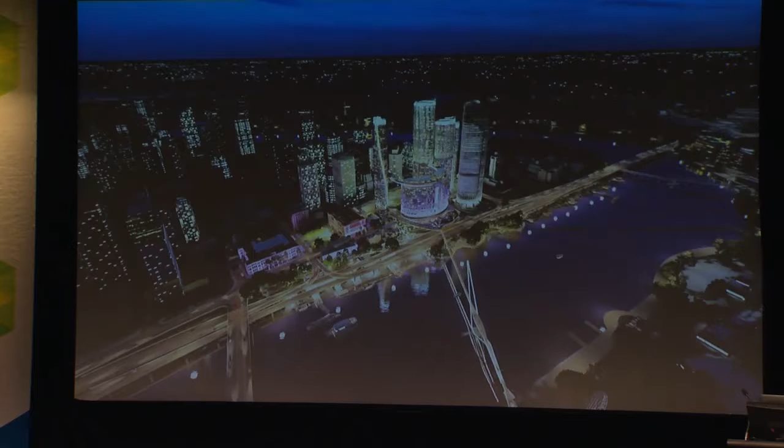So DBC, who are we? We're a consortium of Star Entertainment Group and a couple of Chinese-based companies, actually out of Hong Kong, Chow Tai Fook and Far East. They're mega companies owned primarily by families.

In addition to what they're doing at Queen's Wharf, that same consortia group is also involved in Star Sydney, a lot of work being done over in Perth at the moment, Jupiter's Casino at the Gold Coast, and they've just bought Marina Mirage. Chow Tai Fook have also just bought Alinta Energy, I think they paid 4 billion Australian dollars for them 2 or 3 months ago. So they're mega companies.

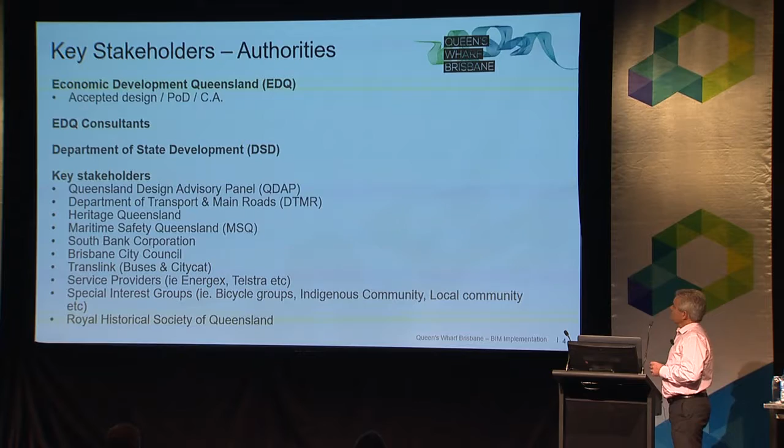On the project, because it takes up about 10% of Brisbane's CBD, a 20 hectare site, every man and his dog wants to be involved in it. So everybody you can think of wants to look over our shoulder and have an influence on what we're designing. This is just a list of a few of them, it just goes on and on.

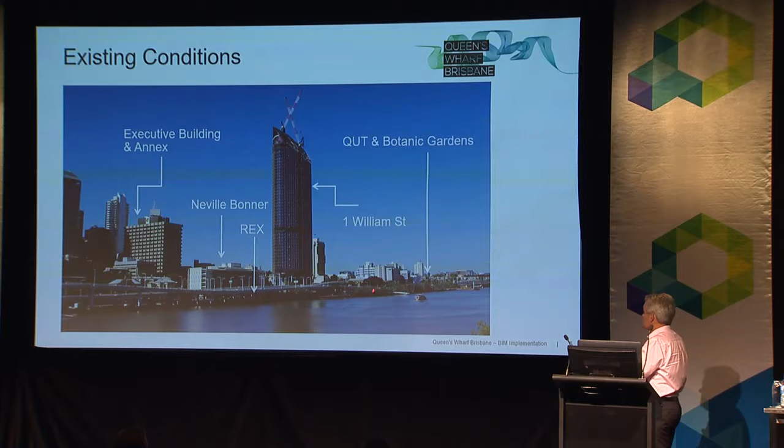The existing conditions, for those of us from Queensland, you'll understand that this area under the Riverside Expressway is not a pretty place to be at night. It's really underdeveloped. The expressway's been an eyesore in Brisbane since it was built, and everyone's struggled with how we get it integrated into a precinct revitalisation.

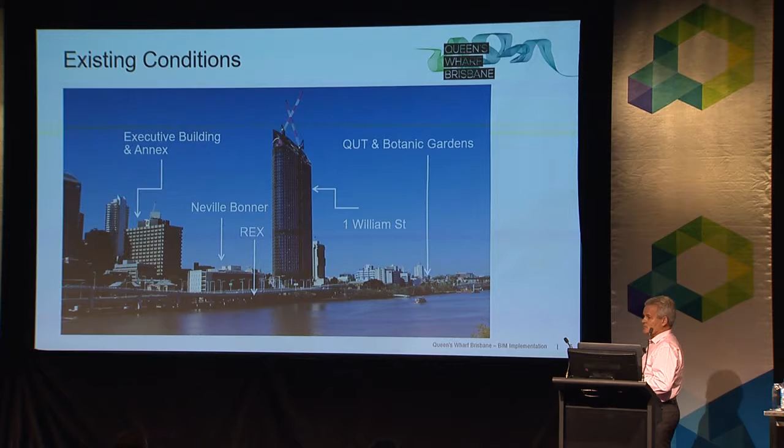So recently the state government moved into their new building at 1 William Street and vacated a lot of these other buildings, the REX, the Executive Building, Neville Bonner, and the Annex. So we've just started demolition of these buildings, these ones here.

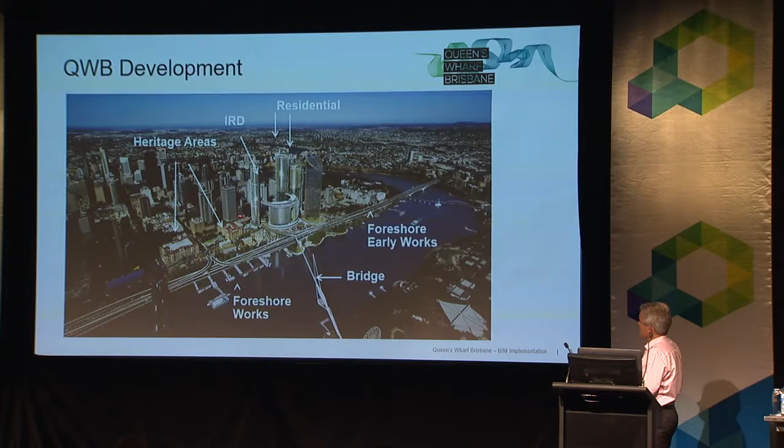And ultimately, that's what the site looks like. Our development agreement goes from the Goodwill Bridge right down to the Victoria Bridge. So in addition to all the sparkly stuff you see here, there's a whole lot of public realm, revitalisation, heritage, and Alastair's presentation will go through some of the work we're doing with that. That just covers the area that our PDA involves.

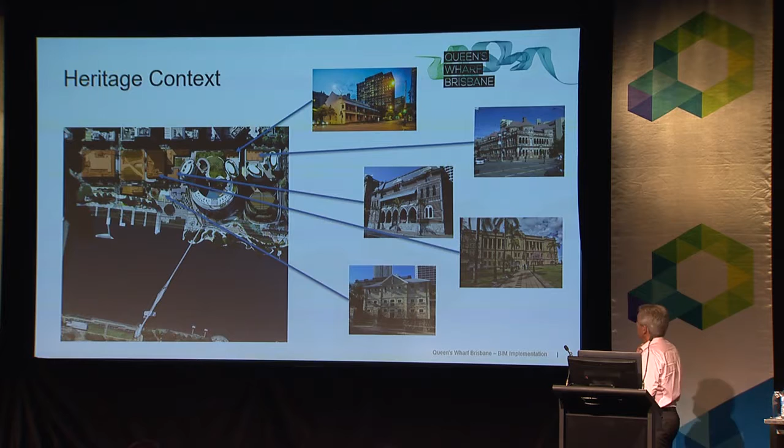There's actually 3 development agreements. There's the one that covers the IRD itself, and then there's a later stage that revitalises the existing casino. A lot of heritage stuff that we've got to build around, vibration monitoring and slump monitoring that we've got going on at the moment, and Alastair will talk about some of the cloud scanning we've done of those buildings.

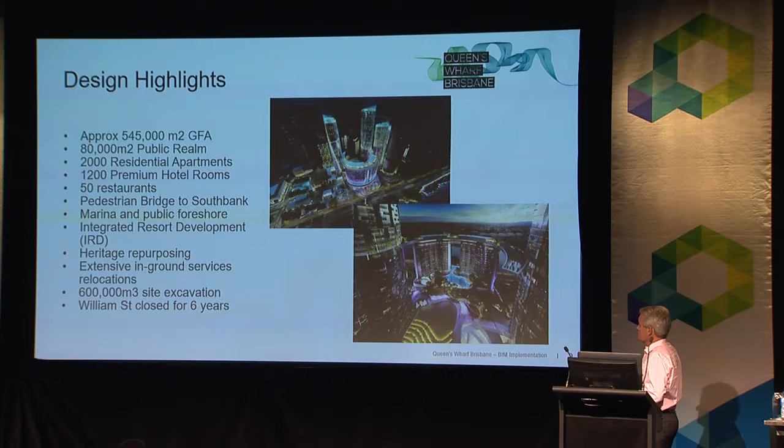It's mega, 500,000 square metres of GFA, 80,000 square metres of public realm, 2,000 apartments, 1,200 hotel rooms, and so it goes on, a mega job. We're just about to start excavation, 600,000 cubic metres of fill to extract. As I said earlier, 99-year operation.

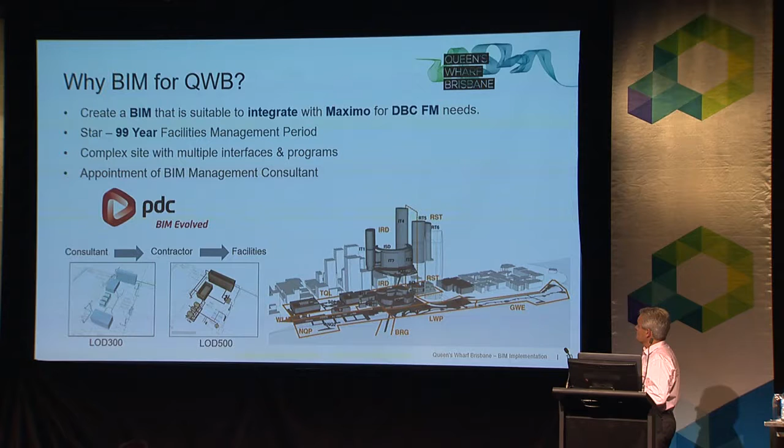It makes, as I say, the I bit out of BIM really valuable to DBC. Luckily, the first day I was on site when I started, Paul Nunn walked into the office. Paul's changed horses since then, but I thought we were in pretty safe hands. So PDC were engaged really early to drive the BIM process, which Alastair will explain.

So I suppose what I'm going to talk to the group today about is how you've seen it's an amazing project, but how we actually approached implementing BIM on something that has multiple different stages, multiple different contractors, multiple different programs, design and construction, and how we're going to tackle that, and what a client actually wants to use BIM for.

So, to get the marketing slide out of the way - PDC is predominantly a shop detailing company that originated in Perth about 44 years ago, but we've transitioned now and we do have a BIM management consultancy division where we deploy BIM strategies and solutions for clients, contractors and trades as required. We've been engaged by John Holland on the Perth Children's Hospital to deliver an LOD 500 deliverable, which we're in the handover stage of at the moment. We worked with Multiplex on the Perth Stadium, which led us to our role on the Queen's Wharf project. We've also done some advisory work for those organisations you can see there.

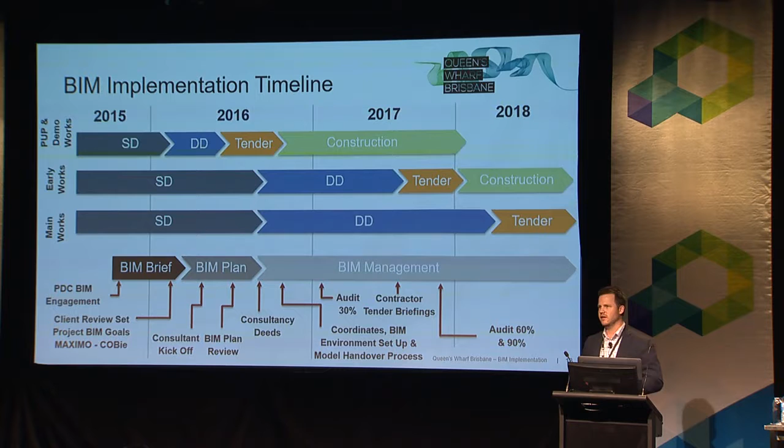That was a little bit later on, but we also had tender briefings, where we used the model, which I'll show you a little bit later. We're doing audits at 60% and 90% at the moment - there are two different ones because 60% is for the main works and 90% is for the early works. So managing a model that's at different stages of LOD is probably one of the biggest challenges on this project for us, and we've discussed that.

So the BIM team - as Chris said, we've been engaged by Destination Brisbane Consortium as their project BIM managers, but we couldn't achieve what we're achieving on this project without the input of all the consultants. At the moment, there are 23 different organisations that feed into the BIM process across 16 different pieces of software.

So it's quite a beast to manage, but it's very challenging and exciting at the same time. So the BIM process, we've heard talks this morning about the Federated Model. Obviously, bringing it back to basics, we build BIM piece by piece.

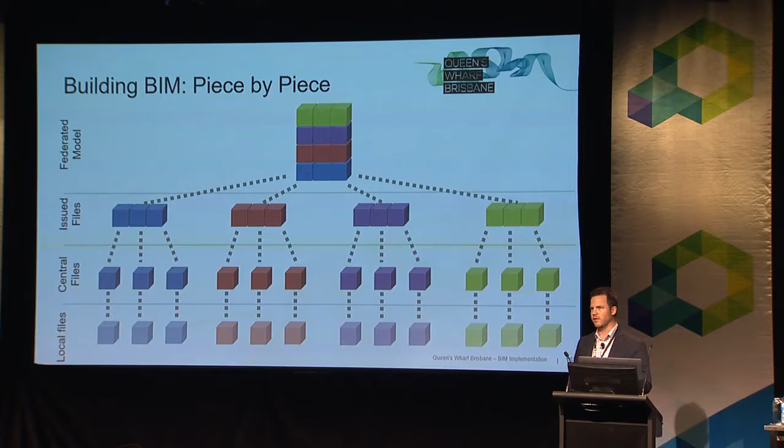If you look at one of these colours, the blue's the architect. We've got 35 Cottee Parker architecture models coming in, and we combine them all to create the Federated Model. But why I wanted to explain that is because on this project, Cottee Parker are in ArchiCAD, and WSP, our main services consultant, is in Revit for structure and building services. So we had to have a strategic approach to model breakup and really think about it at the start of the job for two reasons.

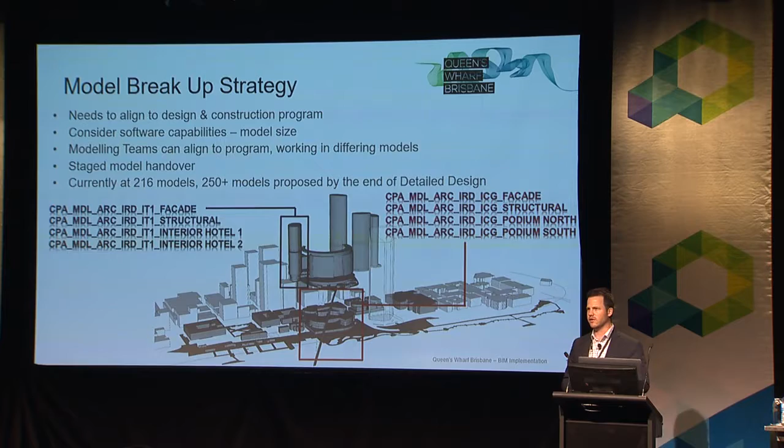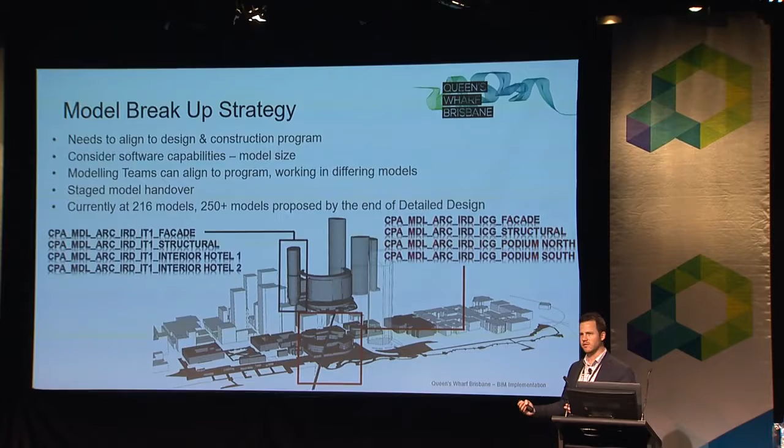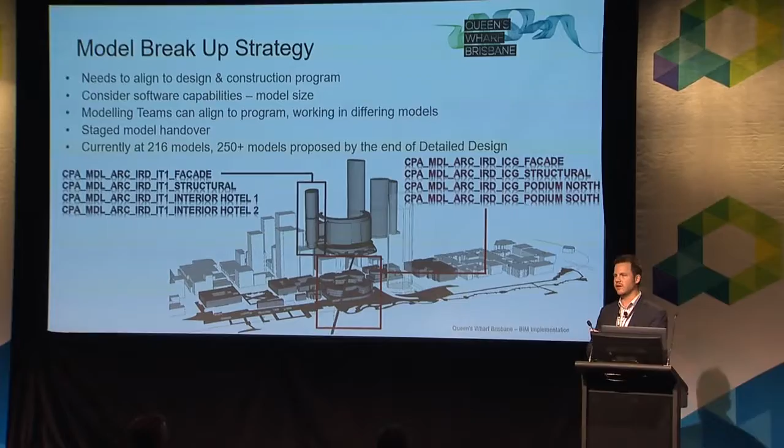The main reason is thinking about construction, design program and construction program, because we want to finish the basement model, get it to LOD 300, and then hand it over to the contractor. ArchiCAD can deal with that entire model in one file, with about 80 or 90 people working on it. Yet when we take that into an IFC file that goes into Revit, we need it in a bite-sized piece that Revit can work with. So we had to consciously think about our model breakup to ensure consultants or different modelling teams weren't pointing fingers at one another saying they couldn't work with the files.

So this starts leading into the interoperability discussions with different software, which I'll expand on later. In terms of the software, we've got ArchiCAD, Revit, AECOsim and 12D in our civil space.

We've also set up the environment, and we're expecting some technical files to come into the mix soon. In terms of management, we spend 80% of our time in Navisworks. We compile all the pieces in there, and we also use a tool called iConstruct, which is a bolt-on to Navisworks. It takes it from being a model viewer to basically our Swiss Army knife, allowing us to automate things, run reports, and be a lot more agile with the content the modelling teams give us. Being an open BIM project with IFC, we also have to use Solibri, which is really good at interrogating the IFC files.

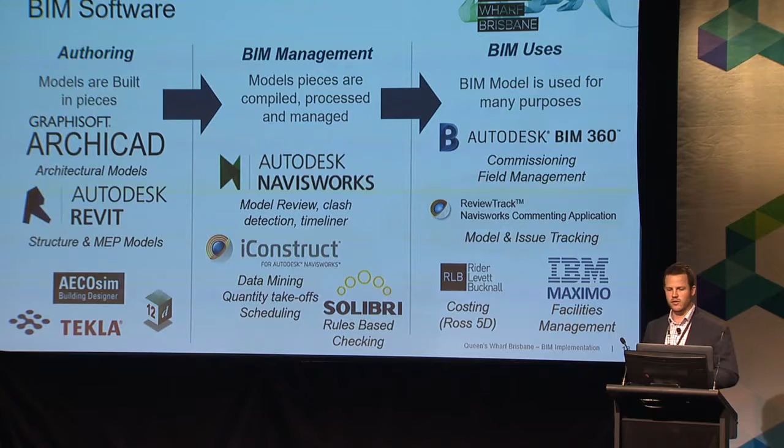Finally, once we've set up that environment, we can move into actual BIM uses. We have the Federated Model set up, and we can go to BIM 360 for our commissioning and field management. iConstruct has a module called Review Track, which I'll show you in a second, for our coordination meetings and how we manage that. RLB are the cost surveyors, the quantity surveyors, and they have their own costing software in Ross 5D, which they use. And finally, where we're going is IBM Maximo for facilities management.

Now, we all know federated models, they're nothing new. But why I wanted to talk about them is that without this, we wouldn't be able to leverage the benefits moving forward. We create this model weekly. When WSP hand over their model to Nielsen's, we turn off the WSP model, turn on the Nielsen's model, and manage that change to ensure the federated model remains the single point of truth.

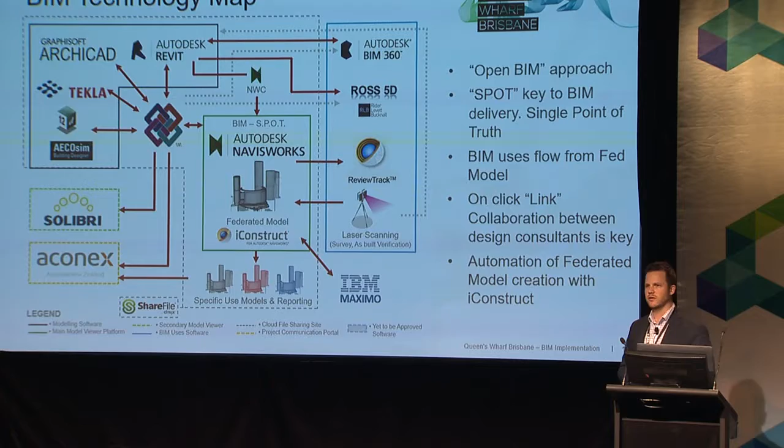Just on the federated model as well, it makes BIM accessible to the entire project team. Chris, for example, doesn't want ArchiCAD, Revit, 12D, AECOsim, all these pieces of software on his laptop. We give the design team Navisworks, and we also colour code it. We set up a heap of views level by level, and it really does make BIM accessible.

We have 216 models from 23 companies, which we're federating weekly at the moment. In the top left-hand corner, that's WSP's services model, which is all colour-coded, and we try to colour-code it to the Australian standard colour-coding system, so there's a connection between site and the federated model.

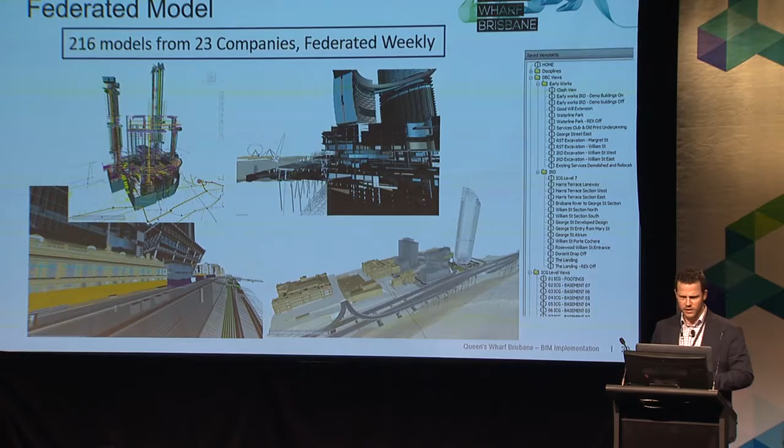In terms of clash detection, it's nothing new, or virtual coordination reviews. This is some of the results from the basement and public utilities work that we went through. But what I wanted to talk about here with clash detection is that there's a coordinated approach to it.

So we're not doing clash meetings or reviews on the main works at the moment. We're about 50-60% design, there's still a lot of things moving around, so it's pointless to do coordination on that area at the moment.

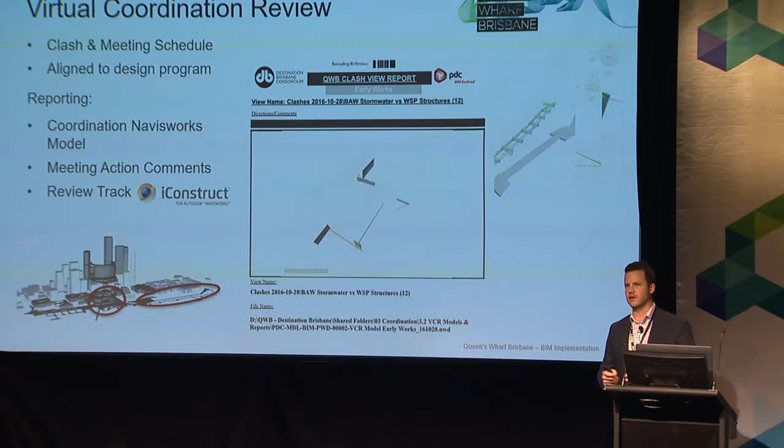We align our clash meetings to the design and construction program. As you can see here, we're on the Goodwill extension, which is the early works, and the early works for the basement excavation. That's what's focused our coordination on to date.

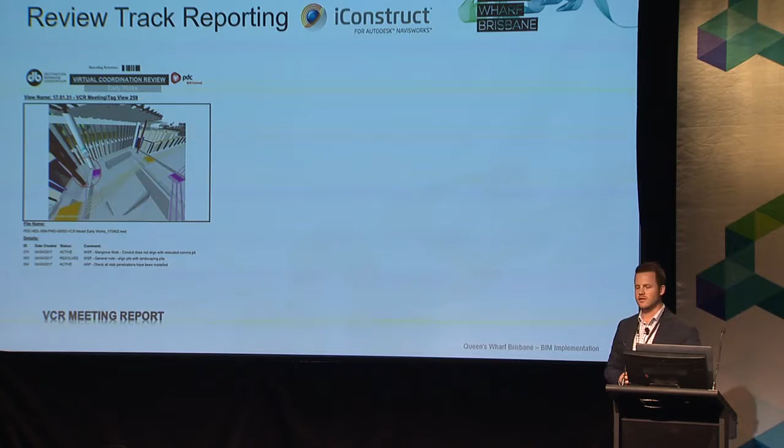We don't track clashes, we track issues. If we clash the entire model, we're going to have 400,000 clashes. So we fly through the early works with the team, all the heads of state at the meeting table, and we raise an issue. You can see on the left here, this is the outcome from a meeting - there's a conduit and pit that aren't aligned, and there's some actions here for WSP to action this, etc.

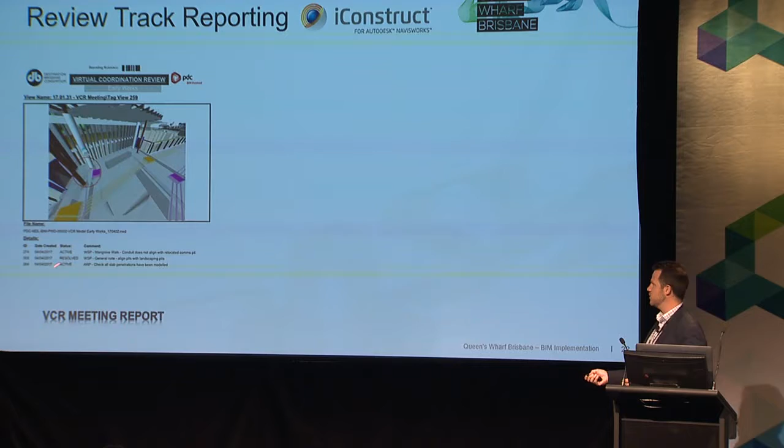Because this all goes into the system, iConstruct Review Track, it's basically a database. We create this federated model every single week, but if we added comments into that, it dies because next week we create a new model. So any comments we raise in our coordination meetings go to Review Track, which is a database sitting above all the models, and you can deploy that back on any iteration of a model.

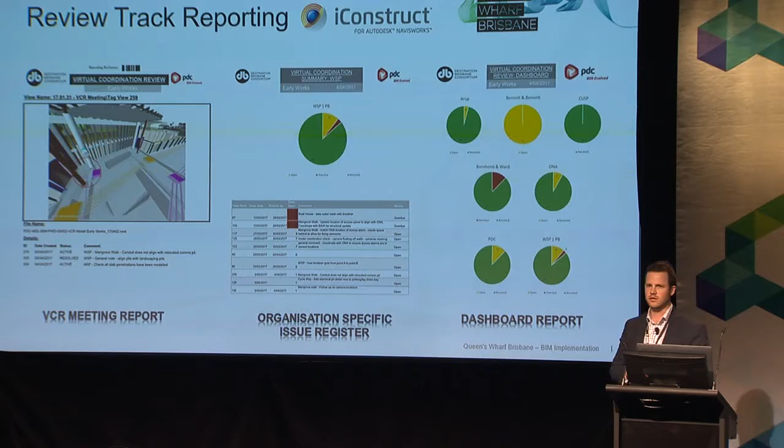It gives us the flexibility to run coordination reports. So WSP, for example, might have 10, 20 items outstanding, and the red ones are 45 days overdue. We can also run dashboard reports, which allow for someone like Chris - I can put that in front of him and say, during the coordination process, these people are playing really well, these people aren't, and we can really get the coordination moving and closing out items.

Challenges to date - I'm going to put the BIM plan there. It's both a challenge and an opportunity. I told you about the steps we've taken to deploy BIM on the project.

We had sessions - I think Chris really loved coming along to these - 6-hour sessions, 400 BIM plan comments, working through diameter and size of piping to be modelled, mechanical, not just with the services trades, with everyone. It was painful at the start, but we're now really starting to reap the rewards because everyone's expectations were managed in terms of what they're going to deliver in the BIM space.

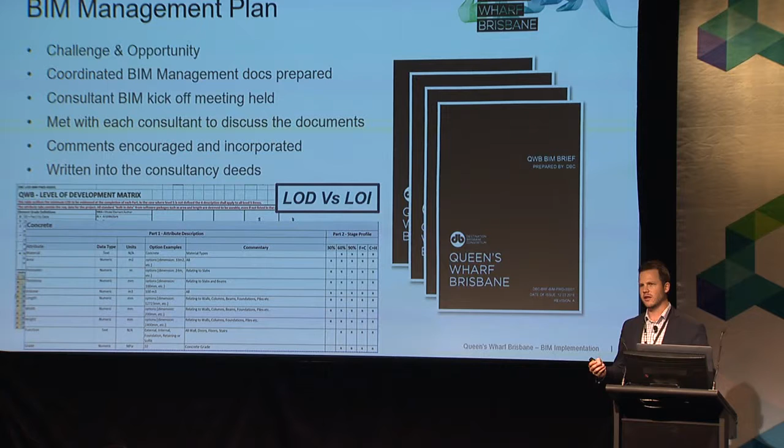The only other thing we did differently on this one - we all know about LODs, and LODs fundamentally talk about the geometry, there's not too much definition about the actual information. So what we set up, as you can see on the screen, is obviously we've got the LOD matrix, but we also went through and set up data deliverable tabs, or levels of information.

So we've got our different design stages - 30, 60, 90%, fabrication, construction, commissioning and handover. This is for concrete, for example, but in here there'll be concrete grade, which is required by the structural engineer to go into the model at the 60% design stage. We went through and created that with every single trade package and worked with the consultants on what they would and wouldn't deliver.

This is all with the intention of making sure that model can be handed over and further developed, and not thrown out and put in the bin when we go to construction.

Big challenge, interoperability between the differing software. For those who know Revit and ArchiCAD - in ArchiCAD you basically open it up, fly to the position in the world where your project is, and start modelling. In Revit, you can open it up, start modelling wherever you want, and then spin the world under your feet to position your building. Fundamentally two different approaches to how coordinates work, and it causes a lot of issues in terms of round-tripping models in the collaboration process from one player to the next.

So what that means is we actually have to transfer the files, the IFC files, through the project 000 point, but we also want a federated model, a real-world coordinates model. So what that's ultimately ended up in is that Cottee Parker or anyone in ArchiCAD provide us two different IFC files at two different coordinates, and WSP, who are doing all the building services, provide us two different IFC files. Yes, it's more models, yes, it's more upload requirements, but it's the open BIM space we have to work with. But we do have it working now.

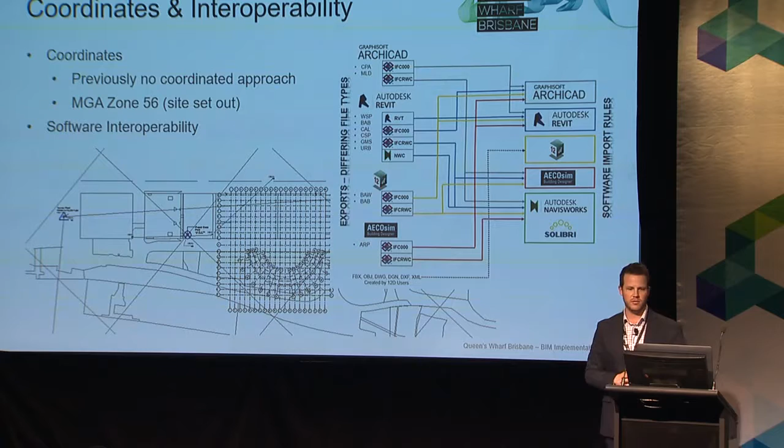IFC. Some of you have worked with IFC, some people speak very highly of it, some speak very poorly of it. IFC without a managed approach is a massive challenge, and IFC was a risk to the project. So we identified this early. For those who don't know IFC too well, the easiest way I can explain it is we come out of ArchiCAD, through a translator, and then through a mapping file into Revit.

I basically call them cheese graters. It goes through a cheese grater, then another cheese grater, and ends up in Revit. Then fundamentally what we have to do is go back from Revit into ArchiCAD, and it goes through those cheese graters again. If you don't line up those holes, the data is not going to flow.

So what we've done is engage Mitchell Brandtman—a lot of you would know him—and Scott Beasley, our specialist sub-consultant who comes on board, and we do periodic reviews about every month or two. As the models are being developed, more things get added that we need to ensure are going through those cheese graters. So we have a managed approach to IFC.

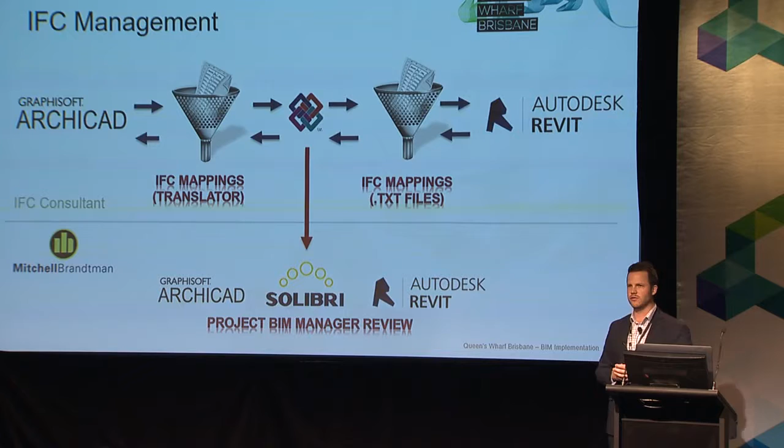On top of this, we have a monthly IFC deficiency workshop where any issues raised over that month with IFC, we sit down and workshop with the consultants. You'd be surprised how easy some of them are to fix—it's just someone naming something differently or using a different tool when they model. It's been really, really collaborative.

Getting the rooms to spaces—so we've got ArchiCAD creating our architecture rooms, yet we want to transfer those into Revit for our MEP teams to be able to schedule elements from. We had a lot of issues with this starting off, but give credit to Graphisoft.

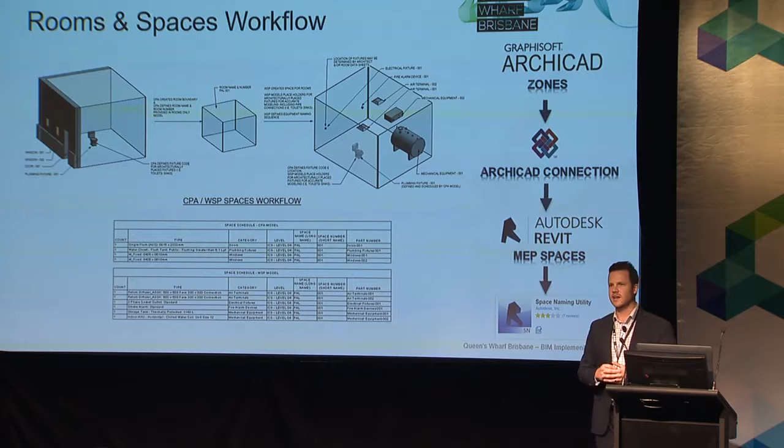One of our BIM managers on the project used to work for Graphisoft and has a lot of ArchiCAD experience. He leveraged his relationship with Graphisoft, and they've actually created a new build for ArchiCAD which has solved this problem. We still have some issues—there needs to be unique room names, otherwise the thing blows up—but it is a solution we've resolved to ensure we can schedule from the model on the MEP space.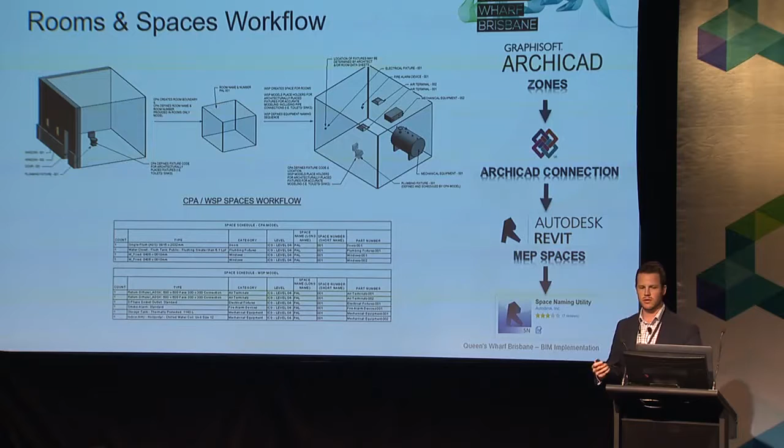Multiple stages and programs. I've already alluded to it a bit with the timeline, but the biggest challenge for us—on past projects like Perth Children's Hospital and the Stadium, there's one major project that moves through design, construction and handover. This one, we've got potentially 7 different stages, all moving at different speeds. So managing the models at different stages has required a bigger BIM management force to achieve what we need to achieve.

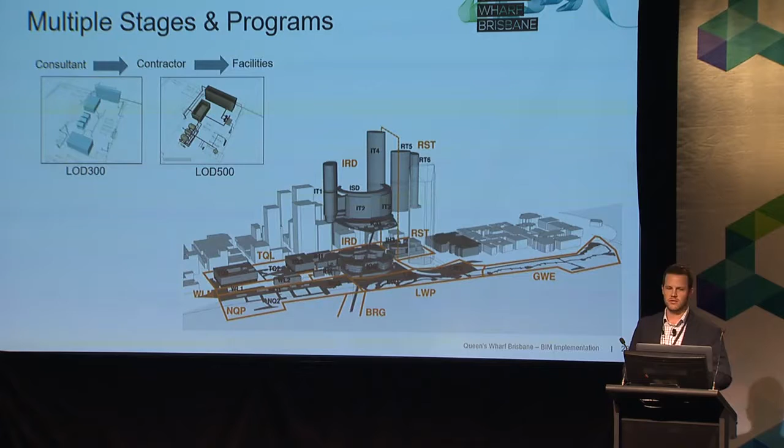So that's our challenges, and now let's get into some of our successes. I believe Ash and Liam from Bennett & Bennett are somewhere in the crowd, so if they want to put their hand up—Bennett & Bennett have come on board, and we point cloud scanned the entire precinct.

You can see the point cloud in the top left-hand corner, and then they went through and back-modelled—17 buildings, 4 surfaces, including the riverbed. Because we're putting the bridge across the South Bank, we needed to understand what the riverbed looked like, and they've actually LiDAR scanned that as well.

The biggest win, though, is the in-ground services model. They went out and LiDAR scanned the areas we needed, and then combined as-built records, some tracing, and dial-before-you-dig data for places we didn't have information on, creating this in-ground services model. Different levels of accuracy were tagged on it, so something tagged A we know is exactly where it is, and something tagged D is roughly where we think it is.

We then managed Probuild through when they installed the in-ground services, and whenever they opened up the ground, they had to capture the information and feed it back to Bennett & Bennett to update the existing in-ground services model. Very important for us, because Probuild may or may not get another contract—they're obviously bidding for it—but who's the next contractor on board? We need to ensure that in-ground services model is accurate, because it's going to be used by another contractor.

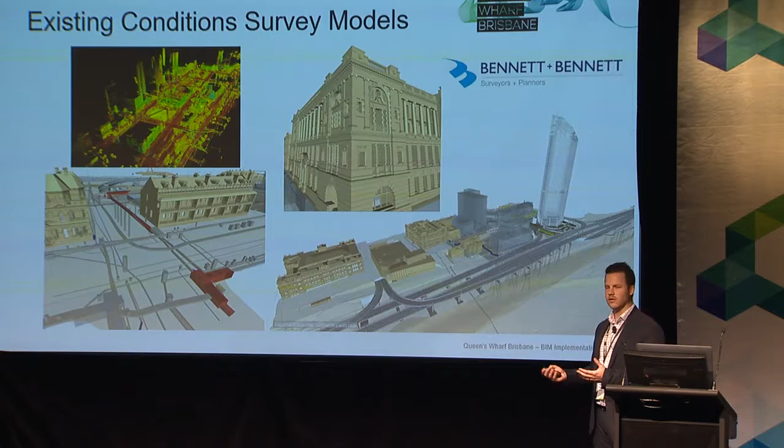Multiple different lots and precincts across the site, and as Chris said, you saw all the stakeholders involved. There's multiple different applications, approvals, and processes, depending on which lot. So we modelled them and Bennett & Bennett provided that, put those into the model, and as you can see here, the effect on the federated model, and you can understand which part of the model is in what lot.

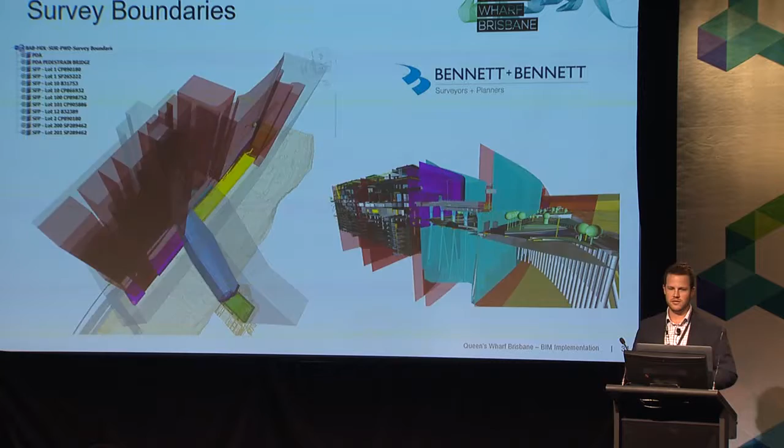Modelling for clashes. During the scoping exercise with WSP, we made sure that the clearance zones for major plant and equipment and cable trays were included. Currently, all cable trays have a 200mm clearance on them. I'm sure once we go through the finite coordination process, that may get squeezed, but at the moment, at 30% design, that was in the model. So ensuring the design is constructible, there were comments this morning about that, and we're trying to make sure we achieve it.

And up the top, the heritage buildings. The state government have a lot of rigour around the setbacks for the heritage buildings, and how we're looking after them, so the laser scanning approach was an easy one to decide on. We've now modelled the heritage setbacks, or planning development requirements, which the architects can link straight into their model, so we can see if design changes are encroaching past the commitments the consortium has made to the state government.

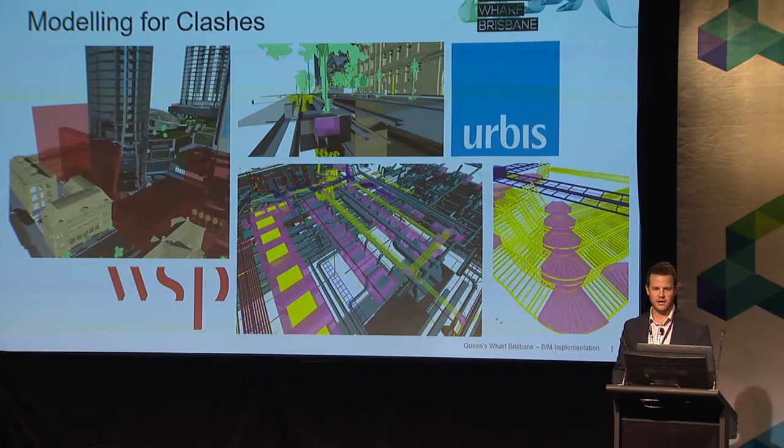So it's an MEP conference, so this slide is to glorify the services on the project. This is the services federated model, coming from 7 different organisations at the moment, led by WSP in the IRD area. The interesting thing on this one is that we're not just dealing with commercial building services. For those of you that know Brisbane, that's the river down there and the Riverside Expressway.

This is Margaret Street, this is William Street, and you can see all the in-ground services we're having to deal with, both new, old, and relocated. So it's infrastructure, linear infrastructure, and commercial building services.

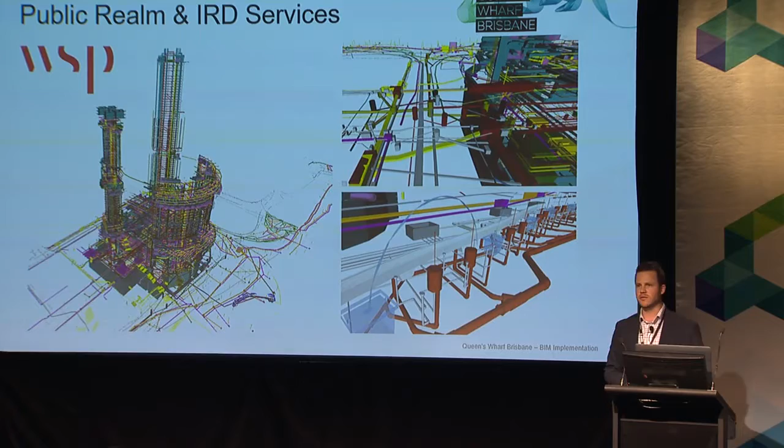Even to the point of the water fountain bubblers, where all the kids run through in the public open space, that's Commercial Aquatics Australia's model - the first model they provided. We're at 50% design phase, and you can see the amount of detail they already provided at 50%, even the water fountain.

So this is just some of it. Once you have that federated model, you can kind of go anywhere. For city models, we used InfraWorks, and we got Brisbane City Council to provide us their model. We link those in and you get a really good context of what the actual federated model is going to look like.

The Consortium absolutely love this because you can see what the views are going to look like from hotel rooms. So we start moving into a marketing space - a client can sell an apartment because this is going to be the view. Obviously the Navisworks federated model is not render quality, but it starts selling the story.

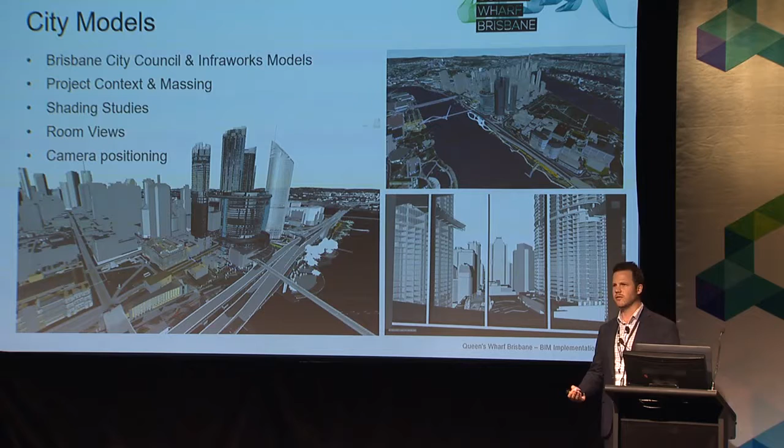This one, we're putting a new bridge in, and there's a ferry terminal here and a ferry terminal here, and the ferry captains were upset because of the tidal movement - they didn't know if they'd actually be able to get around this pylon. So there was about 6 weeks of conversation happening between the consortium and TransLink, and this basically resolved a discussion to move to the next stage very, very quickly. It took us about 10-15 minutes in Navisworks to knock up. A little bit gimmicky, but you can see where you can start using this federated model.

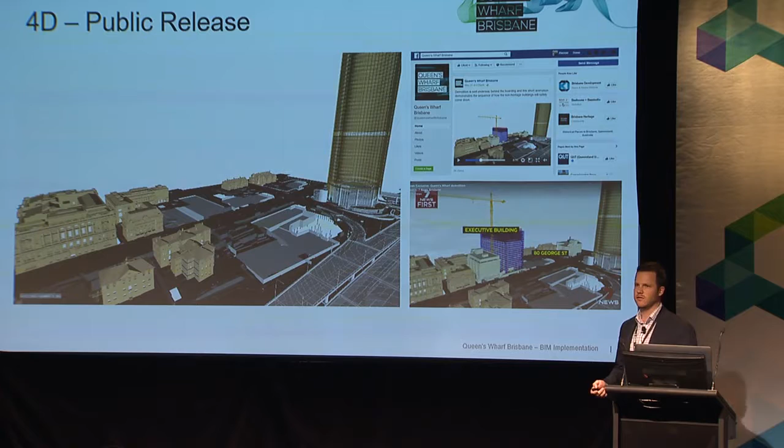Another use - we all know 4D, construction programming, attaching the program to the model - but this was used for the public. We've got a lot of focus from the public on this project, being in the CBD, 10% of the CBD, and everyone wanted to know what was happening. So we created this little 4D video, which Channel 7 actually used on the news in Queensland, and it's on the Facebook page. So using 4D in a little bit of a different manner.

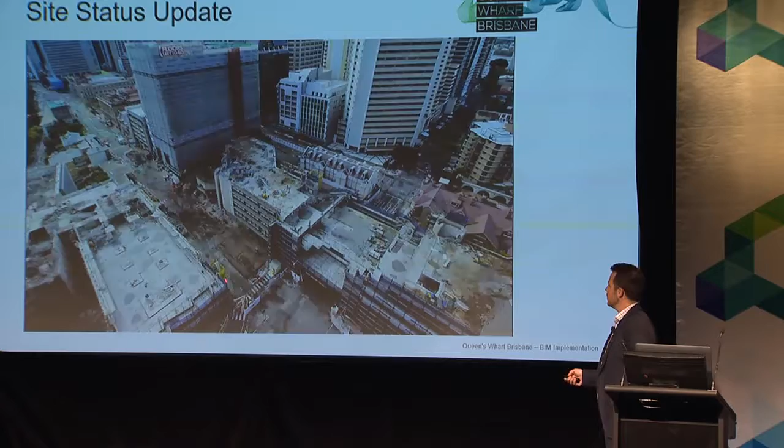Just to show you in real terms, this is where we're at right now. I think Chris pulled this off on Friday last week. This is the demolition coming down at the moment, so this is the current status of the site. Interestingly, if you watch the Neville Bonner building, you can see ProBuild really attacked that in the last week and it's basically gone. I don't know if there were program issues or what, but they've definitely achieved what they needed to.

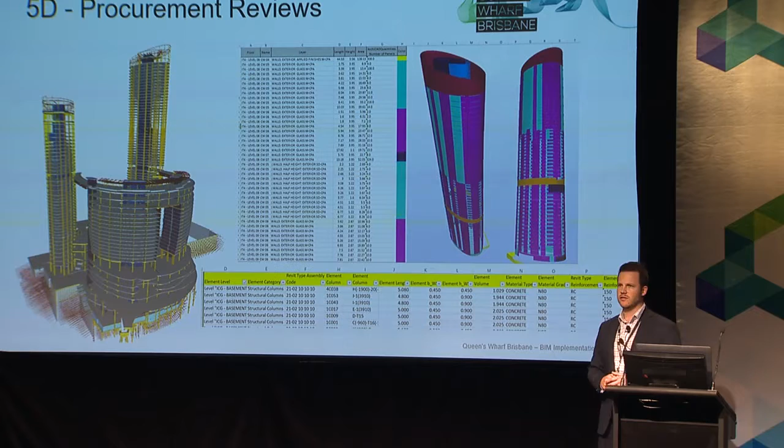Moving on to 5D, RLB are using the model for 5D, but internally what we're using it for with the consortium is this: it's a $3 billion project, and in terms of structure it's going to put a lot of concrete supply demand on Brisbane. So we took all the quantities from the structure model and looked at the program, and we could work out volume. So in January 2020, we know the concrete demand we're going to place on the Brisbane market. In terms of facades, we used iConstruct and Navisworks, and for facade quantities we used Solibri.

Virtual reality, let me get this going. I honestly thought this was a gimmick, even as a BIM manager, when we got asked to do virtual reality. I said, yeah, we can do that.

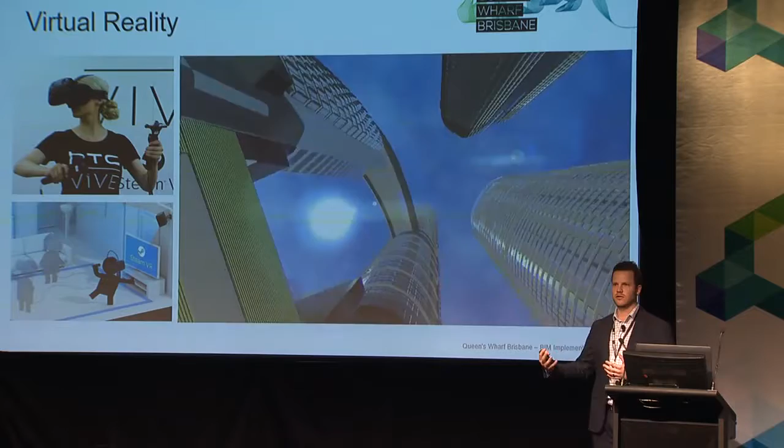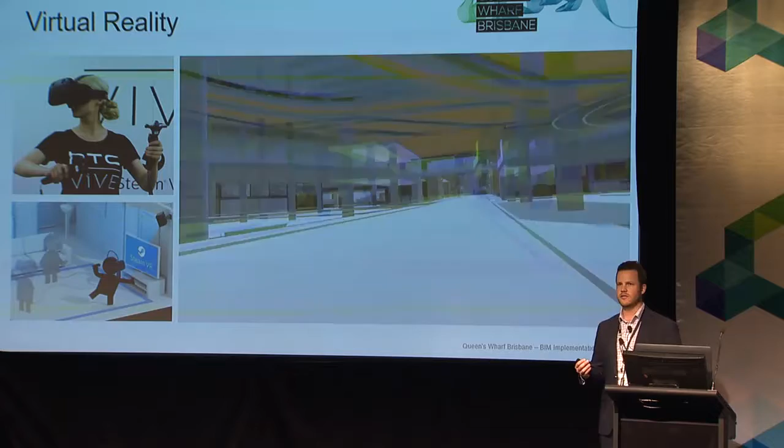We've taken the Navisworks model, exported it, and brought it into Unity, then from Unity into the VR space. This VR headset has allowed the client to understand and see what they're buying and what they'll receive in 2022. The architects use it for spatial understanding and awareness, and the landscapers have it in their office too. This has fundamentally been a great tool. The public communications office will have a VR headset for the public to come in and look at the project. It takes about a week to create the VR model from the federated model, and it's quite an easy task to do.

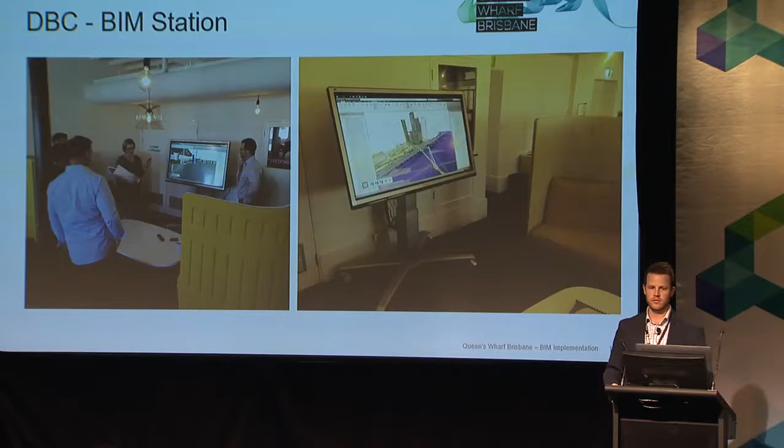Touch screen - this is in the office where Chris and I sit, and it's got the federated model on a touch screen, with collaborative meetings around it, making sure everyone is using the model we're creating. Conscious of time, so I'll speed up a little.

The early works and PUP coordination was a massive success. This is the basement - we had to divert all the services along George Street back down Margaret Street, and we had 6 weeks of coordination process through that. Now, you can do all this coordination, but then the utilities providers come along and kind of stuff up all your hard work. So we actively involved Energex and Telstra in the process. The first model we received is this pink conduit here, which ducks and dives over existing services, and the first model we received from Telstra, managed by ProBuild, was clash-free.

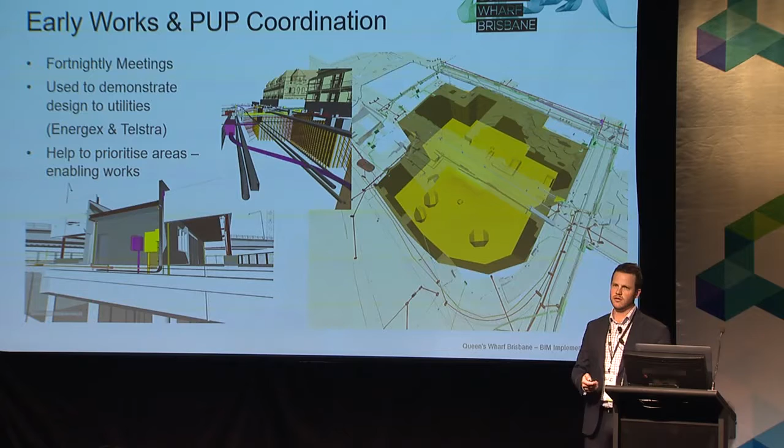We then used the models for the early works tenders, colour-coded based on scope, so it was very clear for the contractors to see what their scope was going to be.

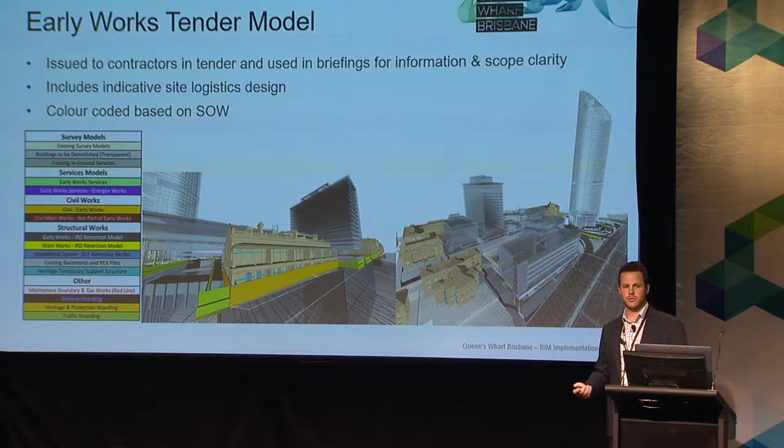Moving on to where we're going next and how we'll capture information during construction - that's capturing COBie information for the Maximo deliverable. We've invested a lot of time reviewing BIM 360, to the point that we had Autodesk fly out their BIM 360 gurus, and we sat in a room for a week going through all the ifs, buts and maybes of how it was actually going to work. At the end of the day we're a developer through DBC, not a contractor, and we're going to have multiple different contractors, so how are we going to deploy something like BIM 360 onto the project?

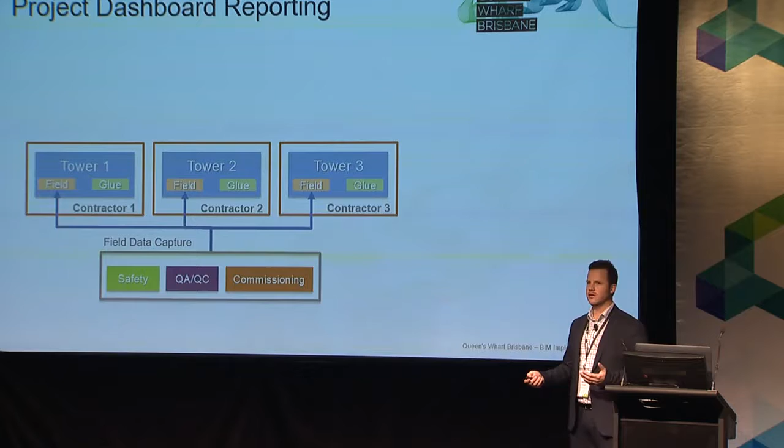For those who don't know BIM 360: we've got our federated model that I've been discussing, it goes onto the cloud, and in Glue you can review the models on an iPad on site, and in Field is where we capture the information required for commissioning, defects, etc. As I mentioned, we're potentially going to have 3 or 4 different contractors - it's not decided yet on the main works - so we need to capture safety, QA, QC, and commissioning data across all those contractors and their trades. By having BIM 360 as a hub, it allows us to capture all that information and have project dashboard reporting across the trades and contractors.

And finally, the commissioning space - we've done a lot of work there to make sure we can capture the COBie information we want. We've set up a lot of template projects. Acknowledgements to CAD Group and Autodesk, who made that week work and came out to answer all our questions before we could get it across the line.

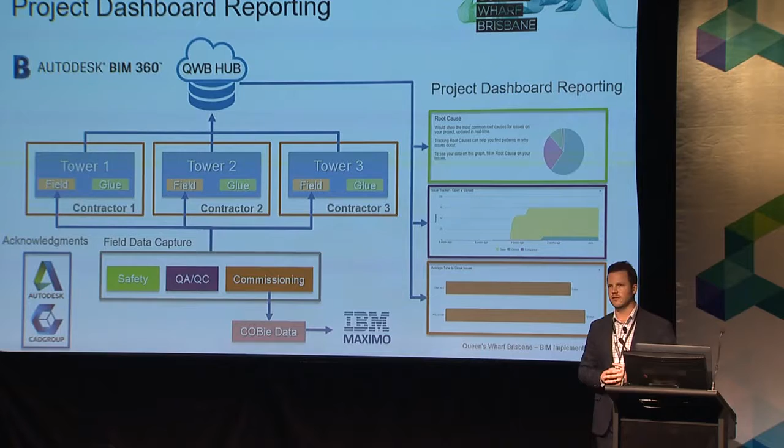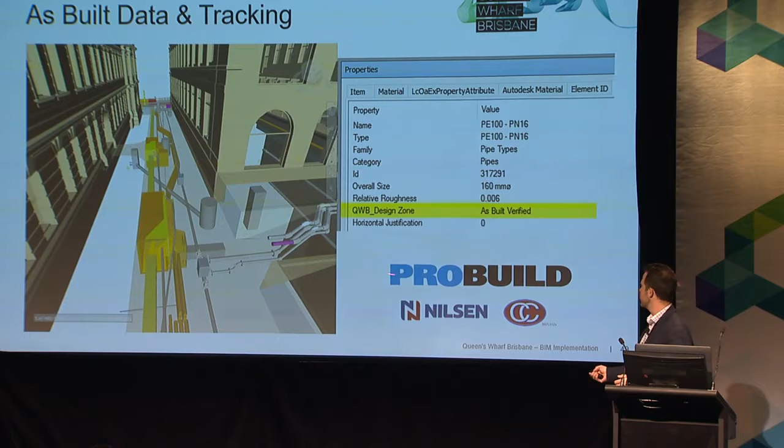In terms of as-built, Stevens Lane, ProBuild, Nilsen's, Christopher's - this is the as-built model coming through here. You can see I've selected this pipe, and we're starting to get the as-built information back in there. So we are verifying as-builts as we move through.

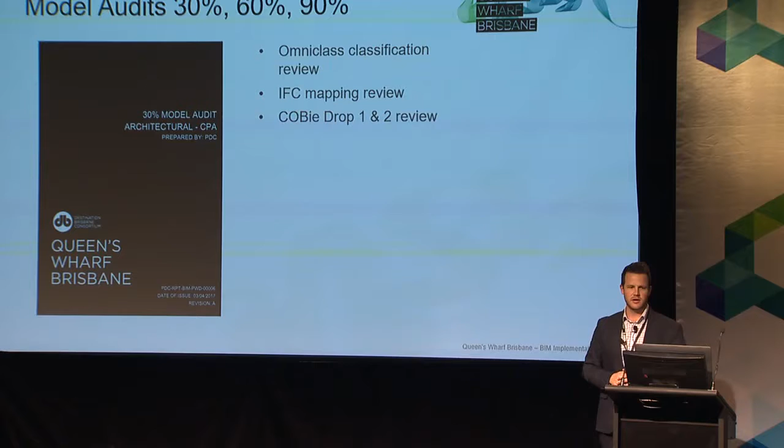All well and good setting all of these rules, but just like planning or standard project management, if you set a plan, you need to review it and realign to it. So we undertake these model audits. We use a number of different tools, provide a report back, and use a traffic light system.

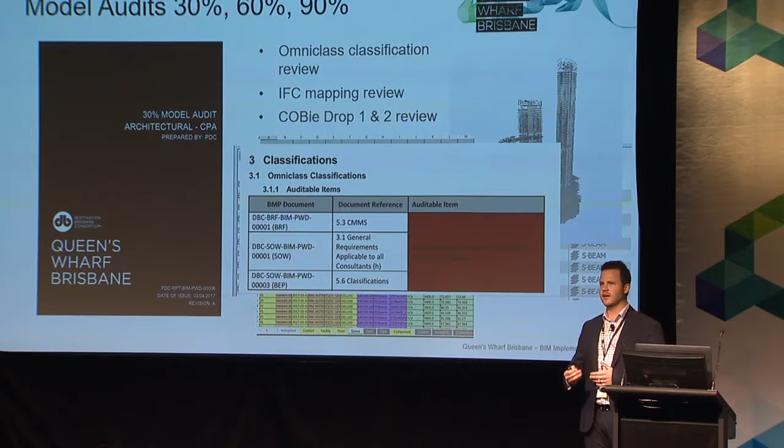So this was the first audit with Cottee Parker. There was not much OmniClass coming through - you see a red light. We now have started getting that information through at the 60% stage. And this is where we're going.

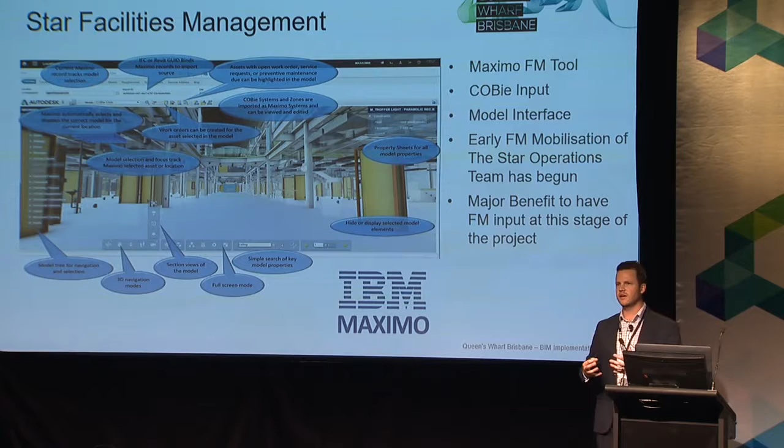So this is the Navisworks interface for IBM Maximo. You can see our federated models in Navisworks - our BIM 360 Glue field capture is going to feed back through, and we're going to end up in IBM Maximo.

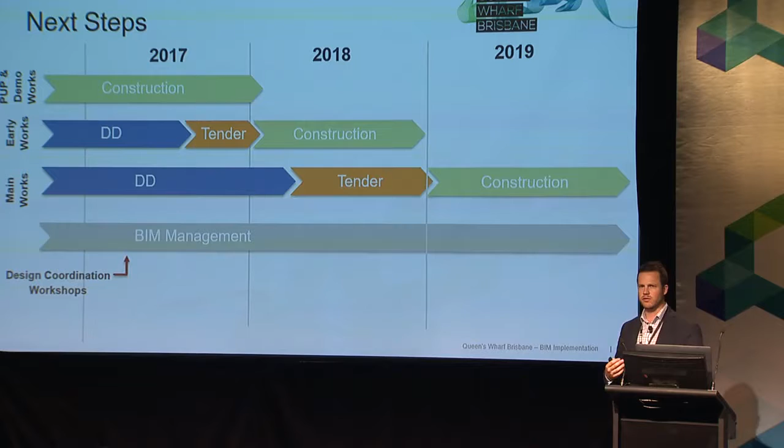So just concluding the next steps and where we're going - the project goes on to 2022. Next steps, we're going to really ramp up our design coordination workshops for the main work, starting all of the VCR meetings with the consultants.

Early FM mobilisation - we are liaising with STAR right now in terms of how they're using Maximo and what they want from that, testing that what we've provided and the file types we have and the models actually fit into Maximo, for a fit-for-purpose delivery.

BIM 360 Field, which I just spoke about - we're going to implement that on the early works as the contractor is awarded towards the end of the year. We're ready to go on that, we've got a user manual, we've got all the licenses ready. We're really excited about those next steps.

Contractor capability review, again for the main works. This one will probably have a lot more rigour around it, a lot more interviews and understanding that the contractor with their services team can actually deliver on what we're asking.

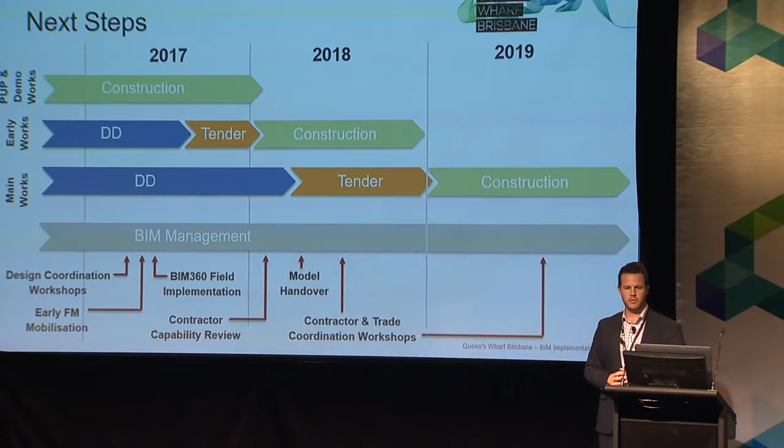Going through that model handover process for the main works, then moving into the contractor and trade coordination workshops. This is not about throwing the model in the bin and starting coordination again - it's taking the consultant's models and doing your value engineering, putting in your chosen materials, your chosen equipment, and then going through the final steps of coordination.

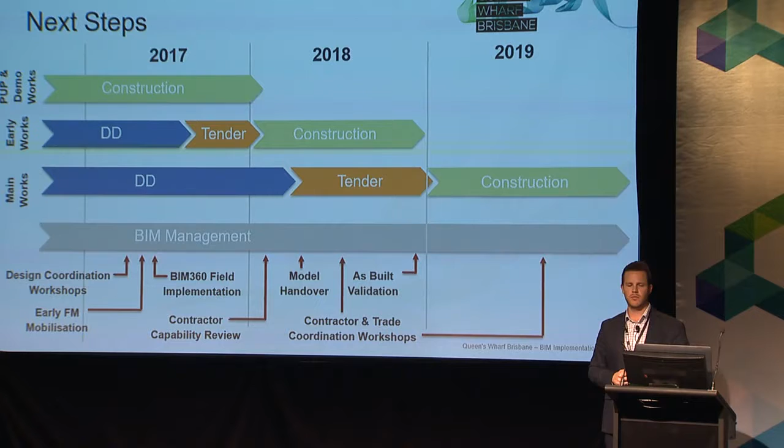As-built validation, so laser scanning, all of those types of things to ensure that we're getting our FM model, then doing our audits at 90%, and contractor and trade BIM induction. Part of our role - we have inductions, we have training, we go into the offices of the contractors and trades and assist them with whatever they need to ensure that we can get there.

And finally, as much as it's me who gets to stand up here and present on the project and what we're doing in terms of BIM, I think we're doing some really great things - it's a coordinated team effort. There is a BIM coordinator in every single one of those organisations who, in my eyes, is very talented, and without their efforts inside their own coordination, we wouldn't be able to achieve what we're doing here.